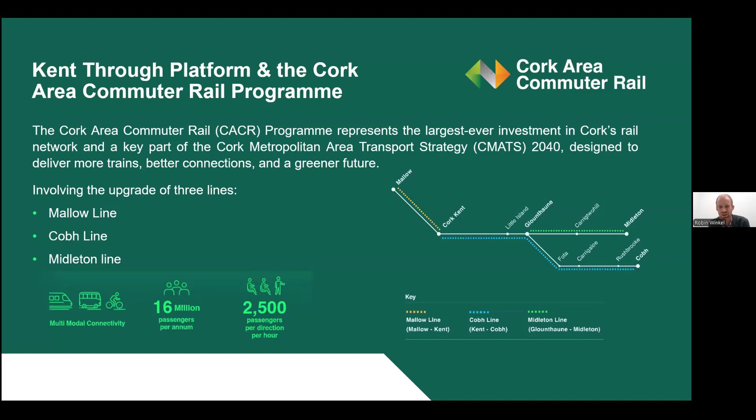The CACR scheme is developed as per direction from the Cork Metropolitan Area Transport Strategy, CMATS 2040. And it's essentially divided into 7 overall sub-projects or packages of work. So if you can go to the next slide, please. Yep. So the 7 projects are listed here. The first of these, which is completed, is the through platform at Kent Station. That's obviously the subject of this part of the presentation. The next 2, which are currently in the construction phase, are the re-signalling of the Cork area.

So all suburban lines out of Cork, as well as the intercity line to Mallow, will be re-signalled. This will allow for a shorter headway between trains. That's the time and the distance between one train and the next in the same direction. That's critical, obviously, in order to facilitate a high frequency service on all these routes.

Next is the twin tracking of the railway line to Midleton. So currently Glounthaune to Midleton operates as a single tracked route largely, and this obviously puts a capacity constraint there. So in order to provide the high frequency commuter service, twin tracking of that route is required.

The first 3 of the projects you'll see are grouped together there for 2 reasons. One is they're all funded by the EU Recovery and Resilience Facility. The other is that we see these within Irish Rail as the capacity projects of the CACR scheme, in that without these projects, we won't have the capacity for the Cork area. With them, we obviously can take advantage of this improved capacity and provide a more frequent service.

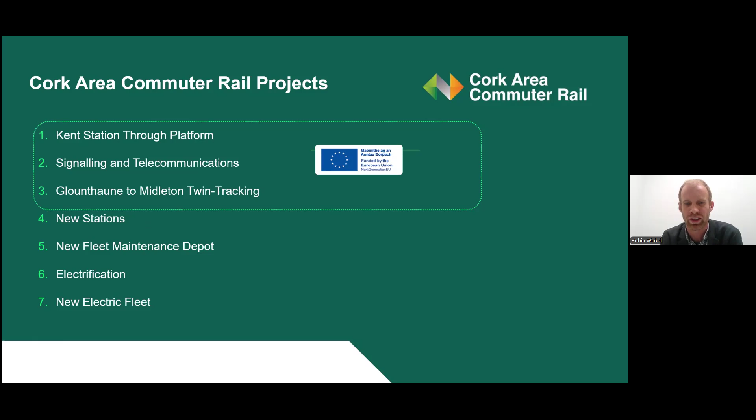The next 4 projects underneath are the ones that'll harness this new capacity that we're developing. Just to run through them, they are 8 new stations along the line. We'll look at them in a bit more detail on the next slide. A new depot to service an electric fleet of trains, electrification of the Cork area to 25 kilovolts, and of course the fleet itself, a new electric fleet of 21 train sets to replace the diesel rolling stock operating on the routes. So if you can go to the next slide.

So here we can see a map of the proposed CACR scheme. Proposed stations are shown in orange. 3 of those are to the north of Cork, between Mallow and Cork, and the remaining 5 are along the existing East Cork lines. The new stations are all strategically located, and they have a range of uses, such as park and rides, for example, at Blarney and Dunkettle, areas where housing developments are proposed, such as Monard and Water-Rock, and areas where there's large commercial or employment uses like Carrigtwohill West.

You can see there as well there's a new depot proposed between Midleton and Carrigtwohill, just to the west of the proposed Waterrock station. Now, at the centre of all this, of course, is Cork Kent Station, which needs to accommodate all of these high-frequency through services. Before the construction of the new through platform, the layout of the station wasn't capable of handling a high-frequency through service on top of existing traffic. So next slide, please.

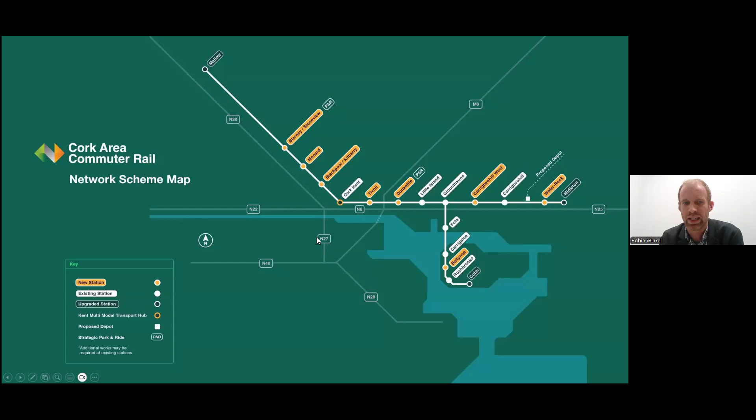Just to take a closer look at Kent Station, this is an aerial photograph of the station before our development works here. This was the track layout, more or less, for the last 130 or so years. Tracks are highlighted in green, platforms in pink there. You can see there are 3 terminating platforms at the east of the station. They service Midleton and Cobh. Then there are 2 curved platforms in the station. They typically service intercity trains to Dublin and Tralee, as well as local services to Mallow.

The issue arises really because platform 4 is typically in use for intercity services, and it's occupied around 75% of the time by a train to allow for disembarking, cleaning, boarding of the hourly clock face service to Dublin. So that means that platform 5 was the only through platform available for through services at the station. And of course, that isn't enough to provide for a high frequency service in both directions, which is naturally going to need additional capacity. So that's why we needed an extra through platform at the station. If you pop to the next slide.

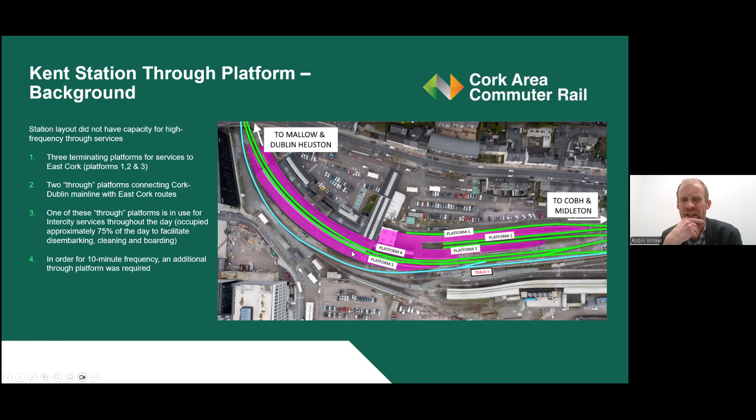So Alex will go into a bit more detail on the platform itself, but just to highlight a few of the key considerations that had to be taken into account for the new platform. Of course, there were many. These are some of the important ones. Curvature of the platform. So the existing curved platforms at Kent Station, those who are familiar with it will be aware, they have a very small radius. It's approximately 180 meters. Modern standards require us to build platforms straight if we can, or with a minimum radius of 350 meters to allow for improved safety. So any new structure that we were going to develop would have to be compliant with modern standards for the railway.

The length of the platform. So in consultation with our colleagues in operations, it was determined that for operational resilience, the new platform should be able to cater for a full intercity train to use the platform. So we were looking at about a 250-meter long platform.

Access, of course: we needed appropriate pedestrian circulation routes through the station. Anything we built had to be compliant with effectively Part M requirements, and needed to be within a short walk of the station. So the development of the design in light of all this led to a preferred option, which was progressed through planning and tender design. Alex is going to go into that in more detail shortly.

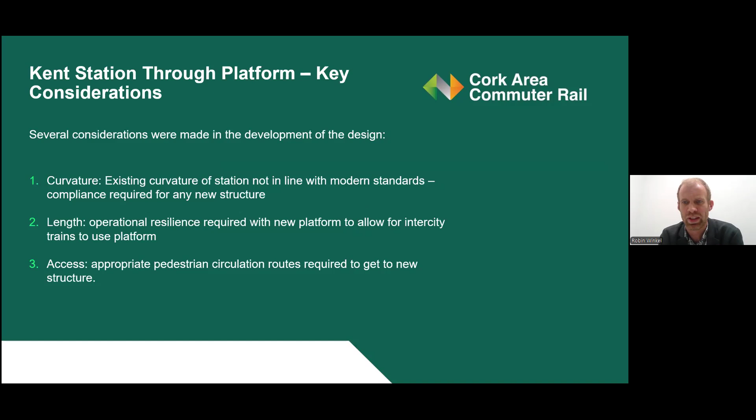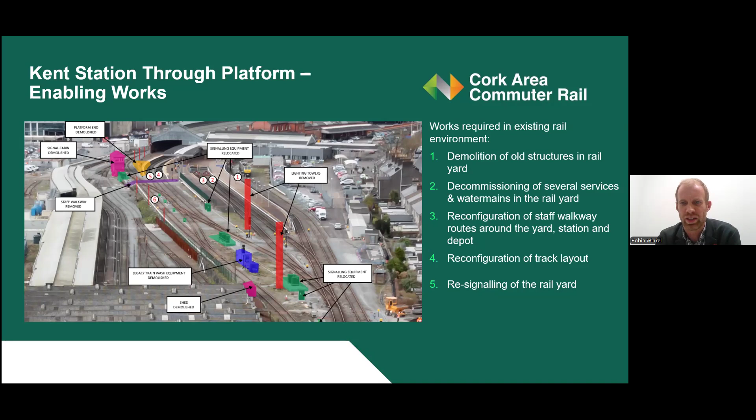Next slide, please. So we did a lot of the track works by night. The track configuration had to be done before the construction could start. The revised track layout allowed for a much more efficient operational regime at the station and more efficient shunting movements. Track works were all carried out by night on the railway. As those who are familiar with Kent Station will know, the area is flanked by a large residential area to the north, so we obviously had to be considerate of our neighbours in all these works. So the track works happened by night. We closed the station for one weekend, and apart from that, the day-to-day operations all continued as normal. And we were able to construct a lot of this by day as well.

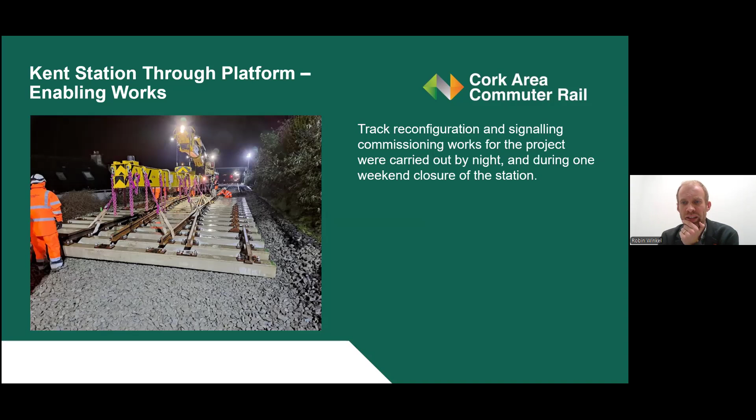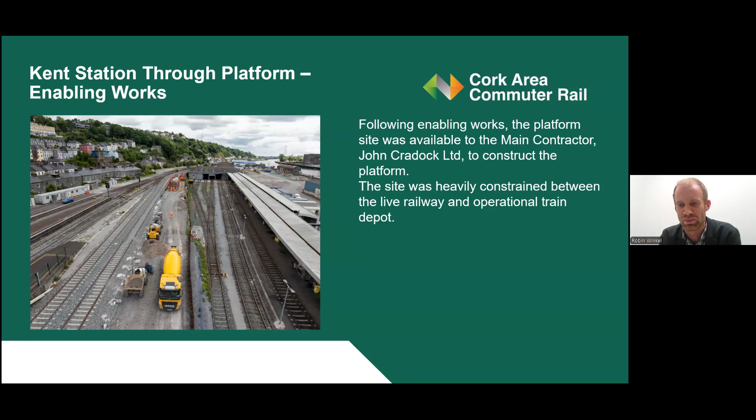So to construct this, we had to cross all these depot sidings several times a day with all our plant, machinery and materials, which presented a huge logistical challenge to the project team. Careful coordination between all the stakeholders, the site team with John Cradock, the AECOM resident engineers, all put in a huge effort to get this project completed. As you'll see in Alex's presentation, the end result was testament to all the work that everyone put into it. That's all from me.

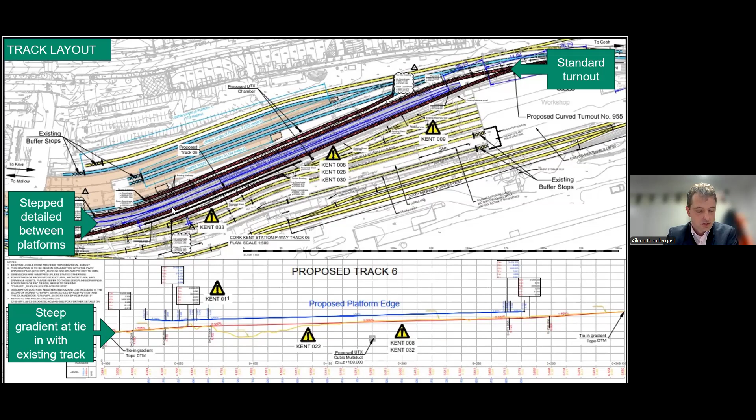Again, just to show the constraints looking the other way of the site, Robin mentioned the curvature, the depot, and also that this is a live operational environment, and keeping the track and the railway station operational throughout was absolutely critical.

Also, in terms of ground conditions, Robin mentioned that this is a 130-year-old station. You can see the color of the track there. When ground investigation was done as part of phase 3, there were soft spots found within the track, and that led to a design for the platform structures that required mini piling.

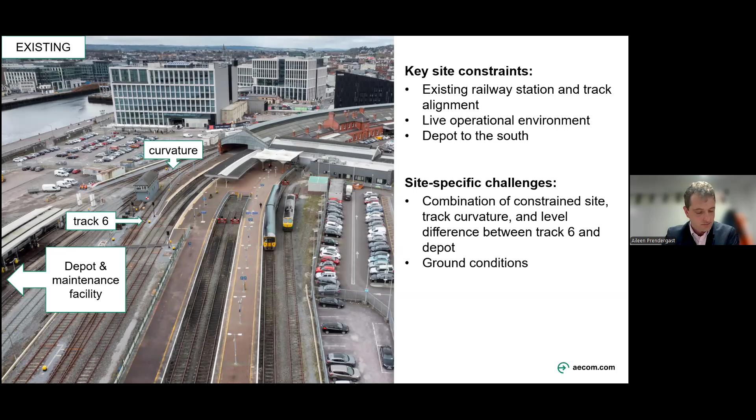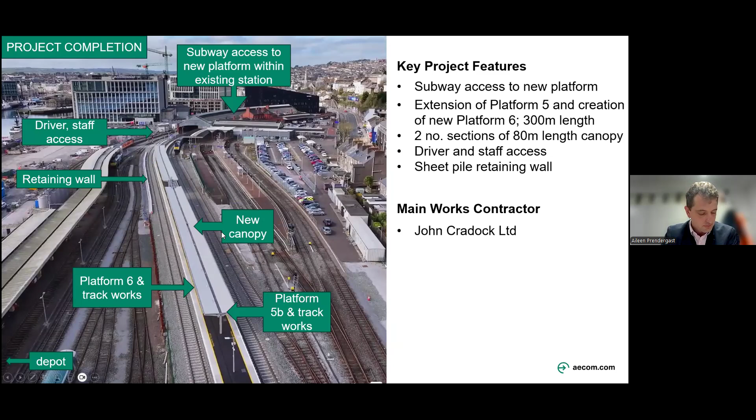So we provided new steps up to the platform so that there was better access up to the extended platform 5 and new platform 6. For persons with reduced mobility, there is a ramp going west. From the bottom of those stairs, going the other way, there's a ramped access which leads to the existing platform 5, and there are fully accessible lifts throughout the station.

Another nice little detail on the design: you can see the handrails which have the downlighters in them. All of that was designed by AECOM's MEP team and coordinated with Irish Rail's in-house MEP team as well. A lot of really good coordination going on between the teams throughout the project there.

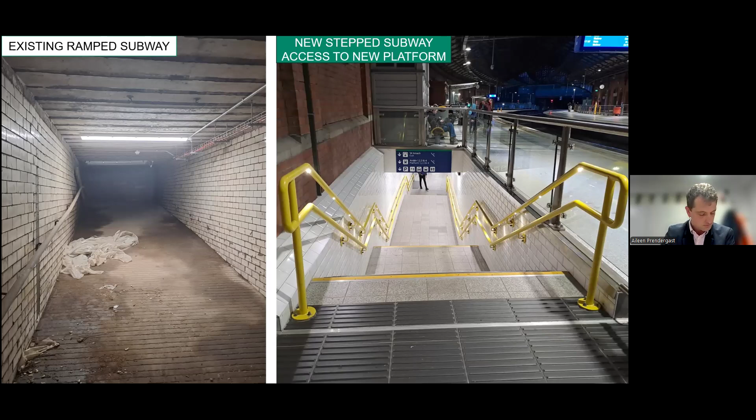As I said, the early stage design was much more functional, but through collaboration and early engagement with the planning authority, we actually upgraded the design to a much more aesthetically pleasing design, and one which is respectful to this nationally significant railway station.

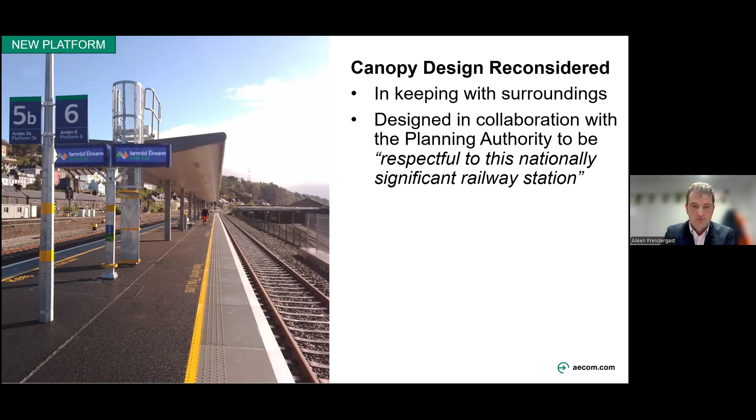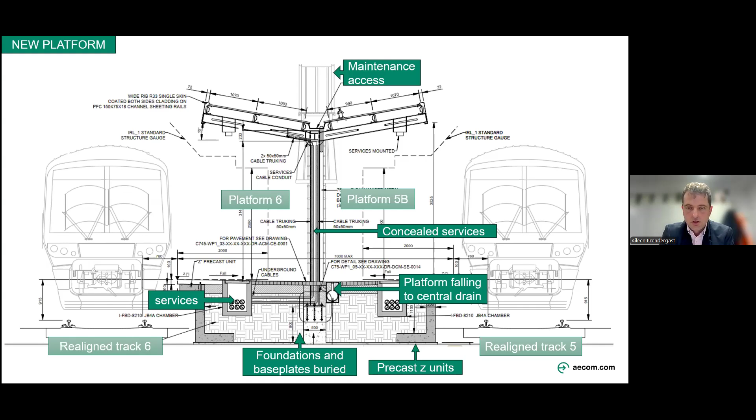Robin mentioned the EU Recovery and Resilience Facility, which funded this project. And to unlock that funding was based on meeting deadlines within that overall program. And then through collaborative and open working with John Craddock, the official platform opening was April 2025 this year. And like Robin says, the platform is operational as we speak. AECOM did project management and resident engineering and employer's rep throughout that process. And it's just a really good program to be on and project to be on.

And then speaking of positives, there were a lot of achievements and outcomes on this project. I just wanted to raise a few. So safety, there were 0 reportable incidents on this project. That was achieved through an excellent safety in design and construction mantra throughout the project, through every phase. We've mentioned about keeping the operational continuity, minimal disruption and efficient sequencing, and the significant amount of works which were done during the day on this project, which was really good. And we've mentioned about the EU funding milestone.

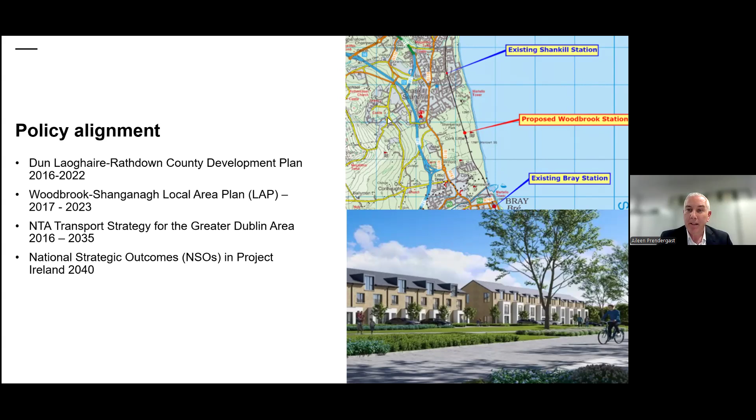So the station itself, obviously, is located between Bray and Shankill. That's approximately 19 kilometers from Pearse Station, roughly a 40-minute journey time by DART. It's the 147th station on our network, and it is located on quite a busy and constrained DART line, with trains passing every 10 minutes, and line speed is 95 kilometers an hour. The station itself is in a cutting.

The brief was to provide two 174-meter long platforms. These cater for 8-car DART trains, approximately 4 meters wide. Access would be provided by steel stairs, concrete stairs as well, running down to platform level. There's fully accessible ramps, and then a bridge, which is also wide enough to be shared as a public access route across the railway, as well as for the station access.

We have the usual platform furniture with shelters, bins and seating, lighting, CCTV, public address system, customer information systems, and standard station signage. There's going to be a new building necessary to house our telecoms equipment, but also electrical equipment and a cleaner store. We were providing a new track access road for future maintenance in this area, which is quite constrained for access. And then we were integrating with the adjacent development by Castlethorn to provide an efficient interchange for cyclists and for pedestrian access, as well as car drop-off and bus drop-off.

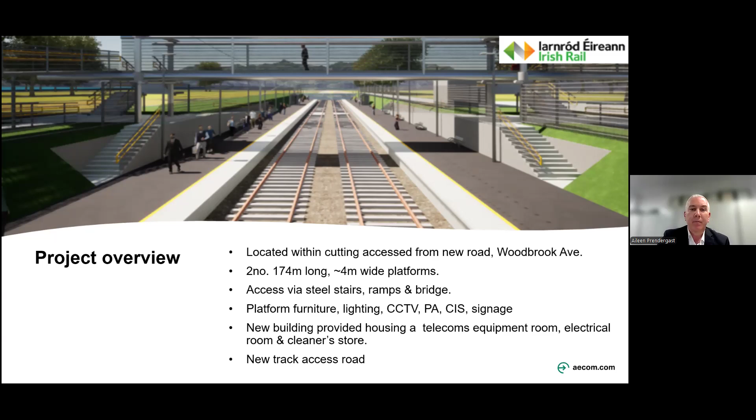The timeline. So the project started out with Irish Rail directly, and the original feasibility study, concept design and preliminary design stage was undertaken by the capital investments team in Irish Rail, and the concept was initially developed by our internal architects. We then appointed AECOM to develop the design further and bring us through the planning stage. Planning was granted by Dún Laoghaire-Rathdown in August '21.

We undertook two sets of enabling works, which I'll get into a little bit more on the next slide, over the course of 2022 and 2023, which would give our main contractor more of a blank canvas to work on. That main contractor ended up being John Cradock Limited. The contract was awarded in October '23 and commenced shortly after in November '23. We substantially completed the station in July and opened it in August '25. The construction stage design support and contract administration, like ER and resident engineer duties, were carried out by O'Connor Sutton Cronin Consulting Engineers.

From its inception, we had close collaboration with Dún Laoghaire-Rathdown County Council. The adjacent developer, Castlethorn, and Woodbrook Golf Club is a close neighbour and a strategic stakeholder as well. And then we had excellent cooperation with our internal departments within Irish Rail, consistent support from the National Transport Authority and also the Commission for Railway Regulation, all supportive of the project, and they really helped us get it over the line. The overall budget was 23.9 million, and we have delivered it under budget.

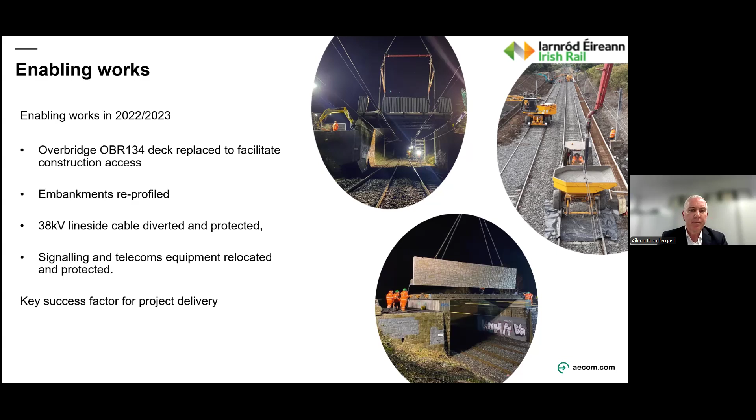So I'm going to hand you over to Aileen. She will talk you through some of the points I've raised here in a bit more detail and some of the key design challenges that arose.

Thanks, David. So I'm going to talk through AECOM's role in the detailed design project and the challenges associated with the site, the proposed station, give an overview in a little bit more detail on the enabling works and how the station integrates with its surrounding area.

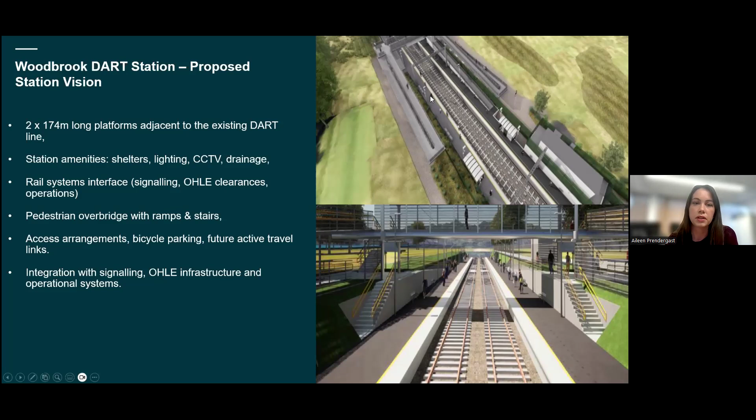So then the AECOM brief is described here. So we were appointed to undertake the detailed design and preparation of tender documentation for the station. And a key point in the brief is that the station design was heavily influenced by the surrounding landscape. So the golf course, the views, the vantage points that are available there. And it was important to the client that the finished product didn't detract from those views. So it was important that a transparent superstructure with lightweight balustrading was provided so that it's set into the landscape rather than taking away from it.

Then you've got platform structures, the TER building, and provision of a permanent way access route on the western side to facilitate Irish Rail's maintenance activities following completion. So the bridge itself was to provide access to both the Greenway and the Castlethorn side of the station, while also providing access down onto the platforms.

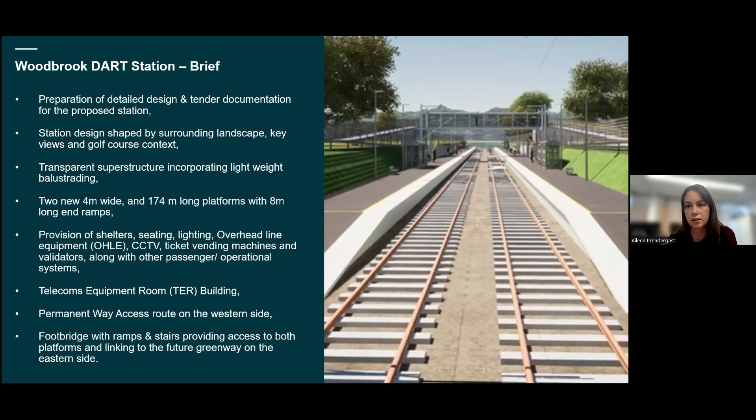So in terms of engineering challenges, the site is quite constrained. You can see that its position here along the existing track is within the footprint of the Woodbrook Golf Club. You've got the Castlethorn development to the western side, and access was fairly limited to the site, but the upgrade of the bridge to the north did assist with unlocking the eastern side.

The track level is about 3 meters below the surrounding lands, which did limit further access and also required widening of the existing cutting, regrading the slopes, and installation of a number of retaining structures within the footprint of the permanent way.

In terms of existing infrastructure around the site of the proposed station, we've, as David mentioned, the overbridge 134 to the north, an existing gas main, there was existing drainage and the existing 38 kV services within the embankments. And then you've got the existing overhead line equipment and signalling, which is required for the DART line and the railway line to function on a daily basis. So all of the proposals had to integrate within those assets.

In terms of working adjacent to a live railway, it was really important not to have any impact on the operational requirements and at least minimize the disruptive possessions required to actually install all of the elements of the new station. So structurally and architecturally, integrating the station into the surrounding landscape was a key challenge and really influenced the design that was developed in terms of material choices and finishes on concrete and so on.

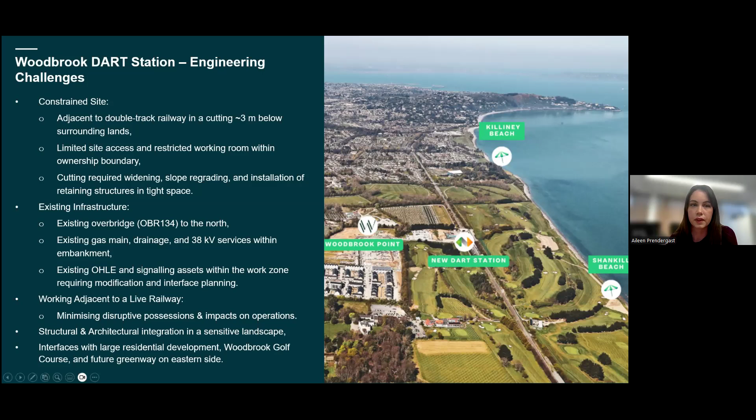So in terms of solutions to these engineering challenges, precast concrete was used widely throughout the proposed station for platforms, which would be typical, but also the retaining walls and the TER building elements. A cantilever retaining wall solution was adopted for the western side of the permanent way access road. And in keeping with the surrounding golf course, a golf ball dimple finish was incorporated in the precast retaining structures at platform level.

In terms of unlocking the site itself for the proposed station, a number of services were diverted. So the 38 kV, the drainage and the gas were diverted through an advanced works contract. The bridge and access ramp balustrades, they incorporated transparent stainless steel meshing so that it didn't detract from the views available across the eastern side out to the coast and to the south, like you can see there in the photograph.

The bridge was a 3-span Vierendeel truss bridge with galvanized steel. And the main 19-meter span of this was prefabricated off-site to allow it to be lifted into position in a single possession rather than requiring multiple possessions. Similarly, the footbridge, ramps and stairs were prefabricated off-site to assist with fabrication times on site.

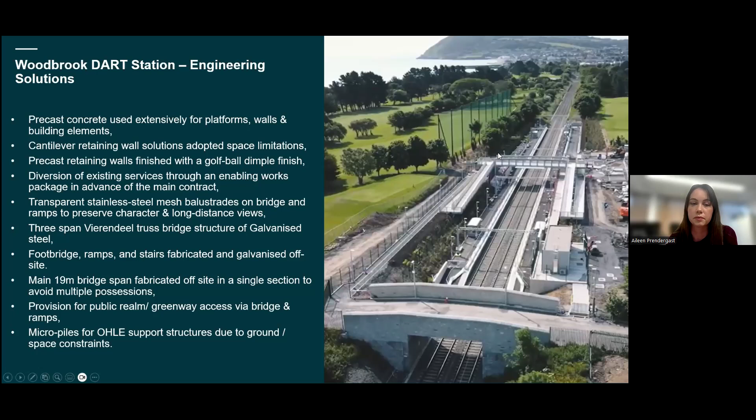So there's just some images here of the finished station. So you can see the kind of golf ball dimple finish on the precast concrete there, and you can see some details of the bridge and what it looks like in terms of the balustrading provided. And that's a closer image again there of the finish on the precast, which really links in with the surrounding environment.

So in terms of the enabling works, the existing 38 kV line on the western side of the station was diverted, and as part of the diversion of that, a solution was to lay the concrete foundation for the Z units to provide protection to the 38 kV. So you can see here on the photograph on the right the concrete slab when it was completed. So this formed the basis for the Z units to be put into position when John Cradock's were delivering the main contract. There was existing gas and drainage diverted.

The embankment was reprofiled on both sides of the station to create more space on either side of the track. So you can see the difference between the slope on both images there. The existing BR24 and 25 signals were relocated. There was some ducting installed on the downside of the platform. And again, coordination with Castlethorn and the Golf Club was critical to the success of both this package and the bridge work package.

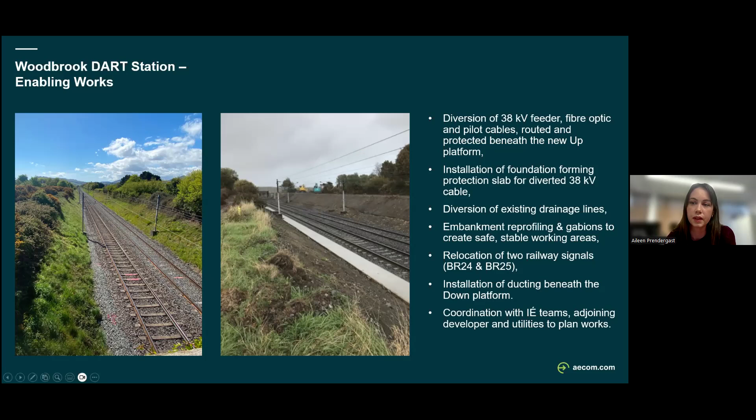So in terms of the station completed, it's now operational since August 25 and is an important element of the Shanganagh and Woodbrook residential area to provide sustainable transport and provide links with the wider railway infrastructure in the area. In keeping with the sustainable transport theme, the access for the greenway and provision of bike parking and storage on the site were important. And in terms of long-term, the maintenance access road to the railway access point will really assist Irish Rail in terms of maintenance of the line in this area.

And the station itself will obviously tie in with the long-term growth of the area in residential terms.